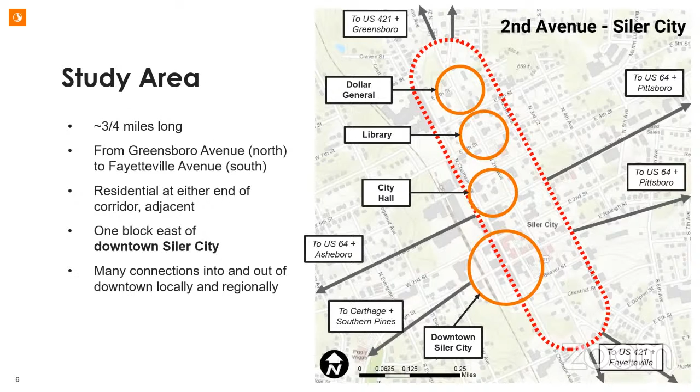Let's take a visual walk through the corridor, starting from the north side at Greensboro Avenue. We've heard a lot already about the bad skew and sight angles folks deal with going through this intersection. When you think about vehicular mobility, yeah, it's a complex intersection, but no one really knows who has right of way half the time, so it becomes complex. Now think about if you're on two feet or two wheels, how complicated that would be. There's no crosswalk - in fact, there's no crosswalk in the entire corridor, in 3/4 of a mile.

So how do you get across that road when you want to cross it? You run real fast. She's right - you're absolutely right, you gotta run real fast. And that's sad to say, because what if you can't run fast? What if you're disabled, or what if you're old enough and you're like, you know what, I'm not gonna run. So you really take your life in your hands, all kidding aside.

So there's a lot of crumbling infrastructure, right? This is owned and operated - you need to understand who owns this road. It's really DOT, Department of Transportation, that owns this road, and we're working with them because they're on our advisory committee as well.

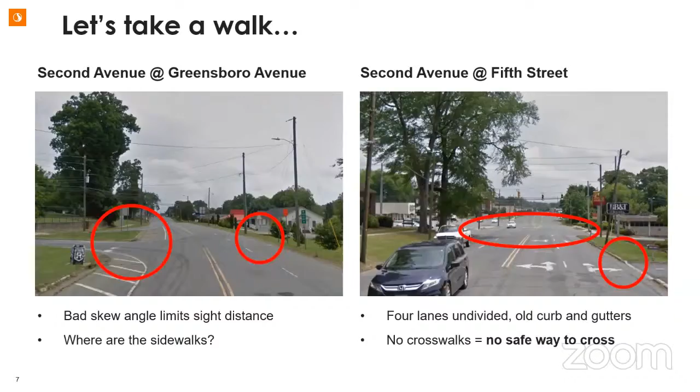Some of the maintenance on it, we've already heard about puddling, floodplain or flooding that occurs along this corridor. We've got 5 lanes and 4 lanes along the corridor. We have huge gaps in the sidewalks. We actually have utility poles in the middle of the sidewalk - so how do you navigate that and get around? There's virtually no pedestrian level lighting here. So what happens, especially in fall, during dusk and after that? Is the street completely shut down? Probably so. No one wants to be out there at 7 o'clock at night when it's very dark.

So there's a lot of work that we need to hone in on and look at how this road functions, not only for vehicular mobility, but more importantly, for bicycle and pedestrian access into your downtown.

We work with a lot of communities across the nation, and honestly we tell all of them: your downtown, if everything else was equal, the tie has to go to who? Trucks? No. Cars? No. People. The tie has to go to people. Every single one of your streets downtown has to be people friendly and safe. Can you agree to that? Absolutely, right? So that's our focus here, because this road is designed to operate for high speeds and high volumes. The good news is you don't have a whole lot of volume on Second Avenue, so we can play around a little bit and redesign what this corridor looks like.

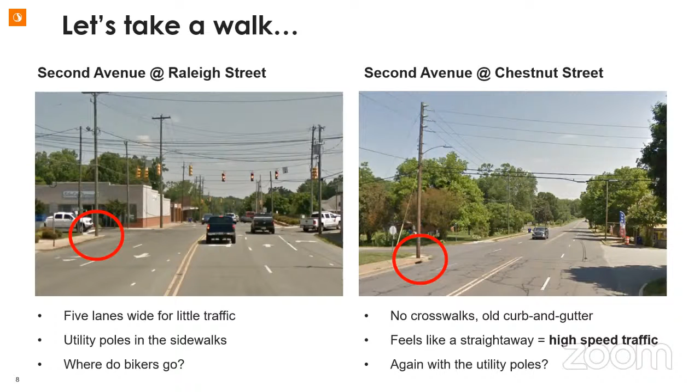Now, we know some of you - I can see a couple of you in the back and the front - own property here, right? We're not only residential, but business communities. So we need to understand the needs and desires in terms of deliveries and trucks and circulation, as well as parking. You already told us about the parking issue too, the lack of parking that we have. That's going to be important.

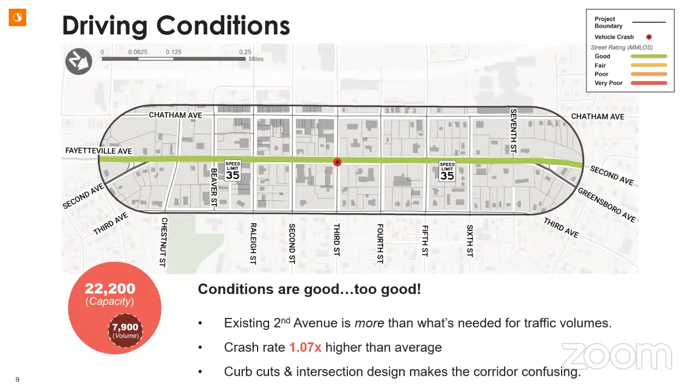If you're driving, it feels pretty good, because you have a lot more road than you actually need. It's been many years since the corridor was bypassed and the road hasn't changed, so it's a road that serves cars and traffic that don't really exist on the corridor anymore. That means we've got a lot of space we can reconsider. How can we better serve businesses on the corridor, whether that's parking? We talk about driving conditions, but that's not parking, and that's not how you necessarily experience Second Avenue.

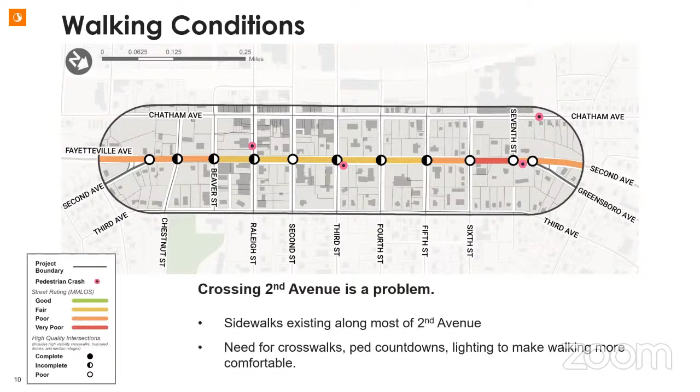When you're walking, on the other hand, how do you cross Second Avenue? You run real fast. Crossing Second Avenue is a problem. We've marked some incomplete intersections, meaning only those intersections have ADA ramps. What if you can't run fast, or can't walk at all? Right now, half the corridor is really tough to use if you have a disability. So this tells us we need to look at how we get across the corridor better: crosswalks, ADA ramps, pedestrian countdowns, and better lighting.

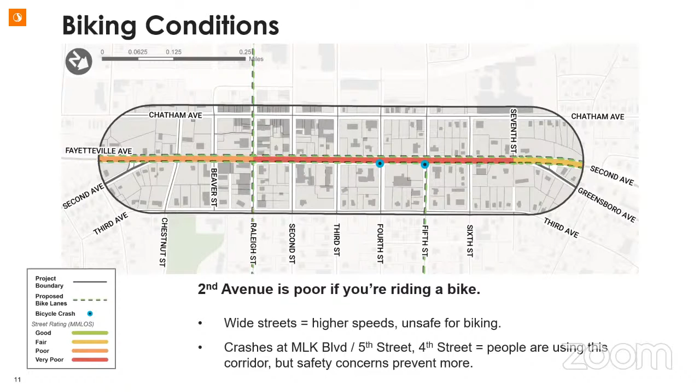And if you're biking, oh boy. Second Avenue isn't really made for that, because there's nothing else there for it. You've got a five-lane road, and if there's not a lot of cars on it, a wide empty road encourages people to drive really fast, which is dangerous on a bike. We know people are using the corridor, we've had a couple of bike crashes, so it's not that no one uses it. So the question is, how do we make it safer for folks?

All right, so that's only one half. We want to know what the data is telling us, and we want to hear from you, what people are telling us as well. So we've got a project website set up through the RPO — thank you, Matt, and to the RPO for helping set that up. That has a survey and an interactive map.

If you haven't been yet, please go to the website, take the survey, add some comments to the interactive map. There's links on the page, because that's a really important resource for us. The good news is we've already gotten some responses to this survey, 66 responses to date, but we always need more. The more that we have, the more we know what we want as a community.

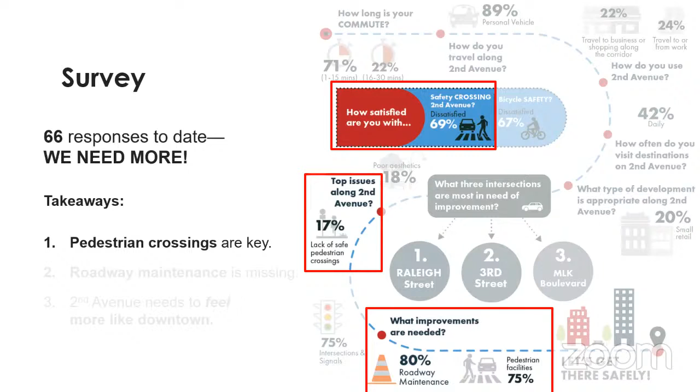It comes as no surprise, really three big takeaways. Pedestrian crossings are challenging — it's the number 2 issue on Second Avenue, aside from people saying it looks bad. Safe pedestrian crossings and better pedestrian facilities, better crosswalks, are the number 2 improvement needed. Road maintenance is also a concern — the number 1 answer is that it doesn't look good. We need better maintenance, and we've got intersections that need improvements — no surprise, those are the big intersections too.

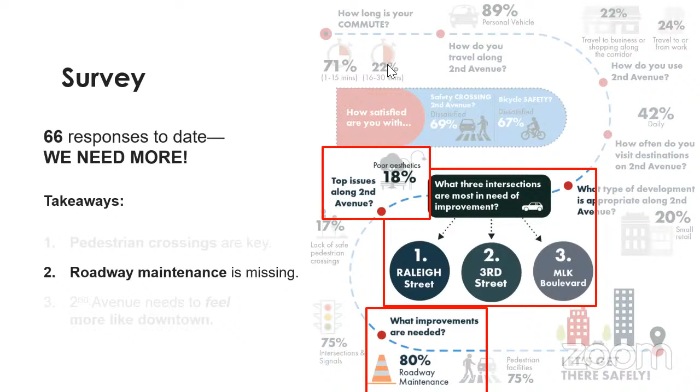Third, one of the things we've heard is that it needs to look and feel more like downtown. You're one block over from downtown, but one of the things we've heard consistently is that Second Avenue doesn't really feel like it's part of downtown. And yet people are using it like it's downtown — they're using it daily, not just to get elsewhere like it's a highway, but to travel to businesses on Second Avenue.

People want to see little shops and little retail, a little barbecue restaurant, and that makes it feel very much so downtown. It doesn't feel like it, but people want it to be a part of downtown.

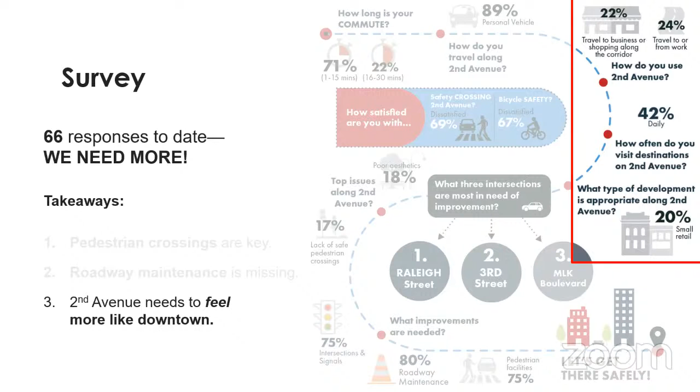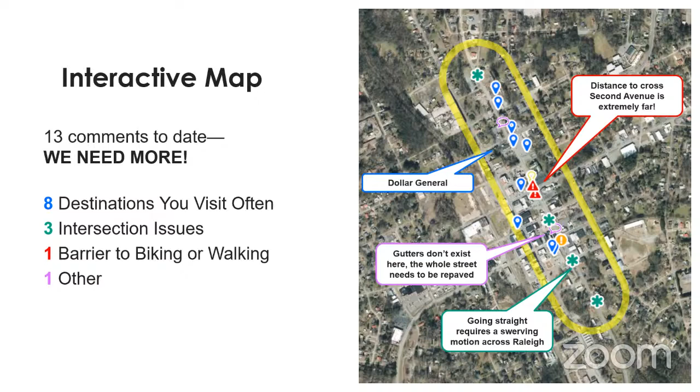Hey, so we're gonna have a little bit of fun. Everybody has a piece of paper, if you can pull that up and show what that looks like. We're gonna have a little voting for the folks that are in person here, as well as on the Zoom call. There's only 6 questions, but honestly we're gonna force you into making some tough decisions, because we can't do everything for everyone. We're retrofitting a problematic corridor, or at least one that hasn't been touched for several years. So let's jump right into it, shall we?

Are you doing it manually? Okay, what do I need to do? That's fine, yep, all right, perfect. Let's get up to the first polling question, and I think you're gonna have to help them launch that too.

For the folks that are here, after our conversation we're gonna open it up to discussion. But we do have different features, things we want you to vote on. We've got sticky dots, we're gonna allow you to vote for the treatments you'd like to see more of, or like to see new, for pedestrian, streetscape, gateway and beautification, as well as biking treatments. And then this is kind of an interactive map thing, things where you say this intersection needs to be fixed, maintenance, or puddles here often, or we need parking here. We'll have that.

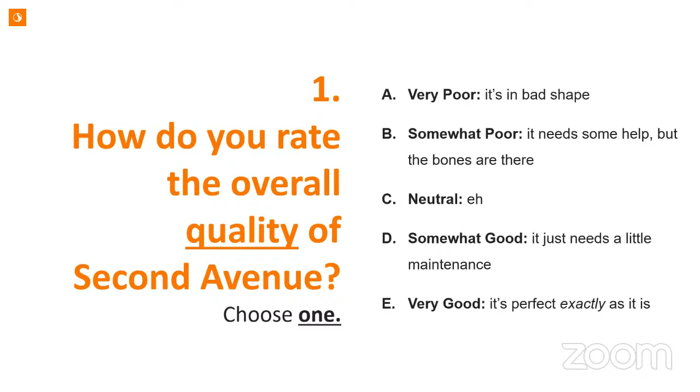Next slide. When we talk about complete streets, by show of hands, does everybody know what complete streets are? Have you heard of complete streets? So few. All that complete streets simply means is that we consider all modes: bicycle, pedestrian, trucking, vehicular mobility, transit.

Who knows what this corridor is going to look like in the next 10 or 20 years? When we redesign this road, hopefully it'll sustain itself over the next 25 years. That's great. So ultimately, this is your gateway, one of your gateways into your downtown. We want to create, everybody wants walkable community streets, right? And this is part of it.

How do you do that? Most of it is done through redesign. You got to give folks an opportunity to walk there safely. We just mentioned the lack of crosswalks, and now everybody, including Miss Phyllis over here, is running across the road. But all kidding aside, if you don't have a healthy environment that's conducive to walking or bicycling, or even that quick access, maybe it's on-street parking people are looking for, then you really don't create that environment that's going to encourage more people in your downtown. A lot of these folks own businesses along the corridor, and you need people to access that. So that's all we're talking about in terms of creating walkable communities.

85%, national poll, 85% of folks that are willing to live downtown are actually willing to give up their car if they had quick access to amenities, services, and goods on a daily basis. Willing to give up their car. 85% of the folks that have been polled. Next.

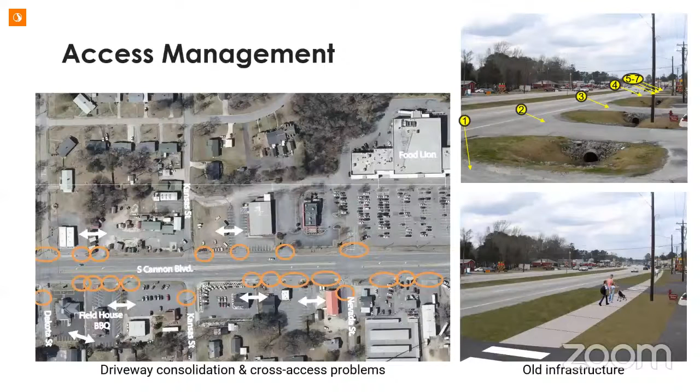Right, access management, so I'll play a little bit into it - not big, but it'll play something. Question number 5: What's missing along Second Avenue? Now you're starting to think, here are the problems. Here, now we're asking you, what are some of the solutions? So what's missing along Second Avenue? We want you to again choose up to 3.

A, street pedestrian level lighting. B, streetscape - street trees, benches, and landscaping, that sort of stuff. And let's face it, it gets hot down here during the summer. Try walking in July or August down here along the street, you'll fry. And so streetscaping is B. C, gateways, we just mentioned that.

C, entrance, exits, and welcoming signs, banners, and the like. D, maintenance, repair of sidewalks, curb and gutter, and pavement. E, on-street parking. F, protected bike lanes, meaning something physical between the travel lane and the bike lane, or it's up on the curb. G, small shops and storefronts, restaurants, that sort of thing. H, something else, other. Tell us in the chat box for those on Zoom.

Choose 3. We're talking about it frying in the summertime. One of the things that contributes to that is having a lot of pavement that you don't need. You can add things like street trees or benches to fill that in, and that'll help bring the temperature down too.

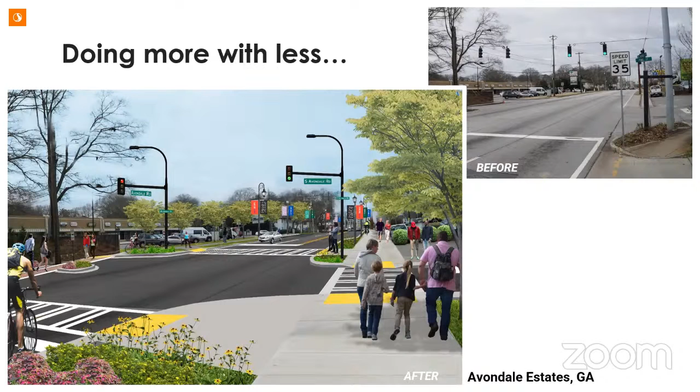Excellent, I'll get off my soapbox. All right, number 6, let's do that. Let's initiate the polling, number 6.

Perfect, thank you. What's the highest priority need along Second Avenue? Now you have to prioritize. We want you to choose 2 this time. Yeah, I know we gave you a lot of selection, but we're really forcing the decision. It's your last chance, and this is your last question.

A, safety improvements. B, bike lanes. C, better road maintenance. D, sidewalk repair, better sidewalks. E, streetscape beautification. F, more on-street parking. G, intersection improvements, that's crosswalks, countdowns, you name it. H, better wayfinding and signage. You know how Rich is going to vote. I, gateway treatments, or J, something else.

Use the chat box. I like this one because it really challenges you to prioritize. It's very similar to the previous one, but we're also doing this to compare results based on what you're saying. Please vote, choose 2.

And this will conclude our Q&A. It's going to open up a little bit too. You guys hanging in there? You're doing great. What's our time check, Dan? We're at 6, we got a good hour still to go.

All right, plenty of time. Just a reminder, we'll be back in the community in the next month, month and a half, to do what we call a multi-day design workshop. And there we actually take all these ideas that you've collectively given us, all the interactive mapping and stuff behind me, all of the visual preference survey, all of the voting you've done, everything online, as well as what we're hearing back today, and really kind of frame out, looking at some of the amenities you want and some of the problems to fix.